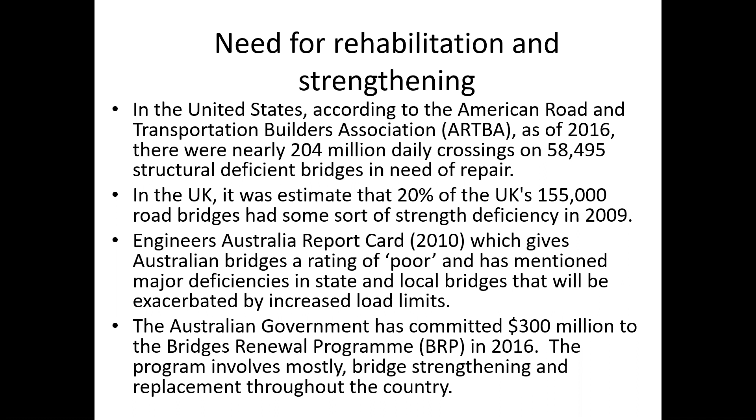Why do we need to do rehabilitation? What's the purpose of rehabilitation? In the United States, according to the American Road and Transportation Builders Association, as of 2016, there are nearly 204 million daily crossings on nearly 60,000 structurally deficient bridges that are in need of repair. There is an equivalent number of such bridges in the UK and in Australia, and the Australian government has embarked on a 300 million dollar project to renew and upgrade the bridges here. I think the situation in the Middle East, in Iraq in particular, is in my view even worse than the situation in the West, insofar as the infrastructure is concerned.

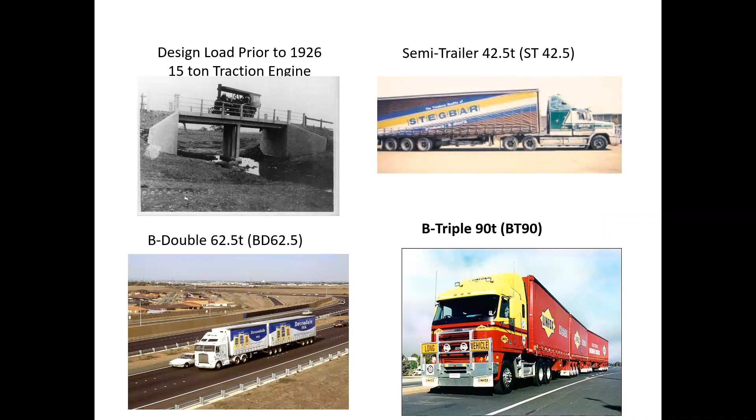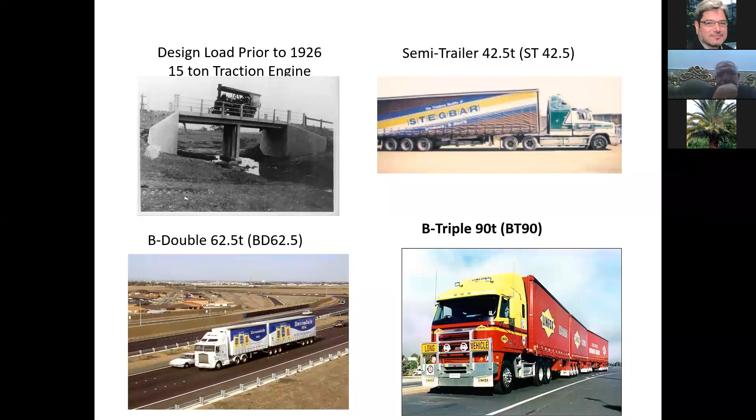Just to give you an idea, we are not just talking here about wear and tear. We are talking here about the increase in the volume and the mass of traffic on our bridges. So just to give you an example, in Australia prior to 1926, the maximum load that you can expect on a bridge is the 15-ton traction engine. What we see on the road network now is much heavier vehicles, like the semi-trailer at 42.5 tons, the B-doubles, and the B-triples, that have very high axle loads individually, as well as a total mass that far exceeds the design of the older bridges.

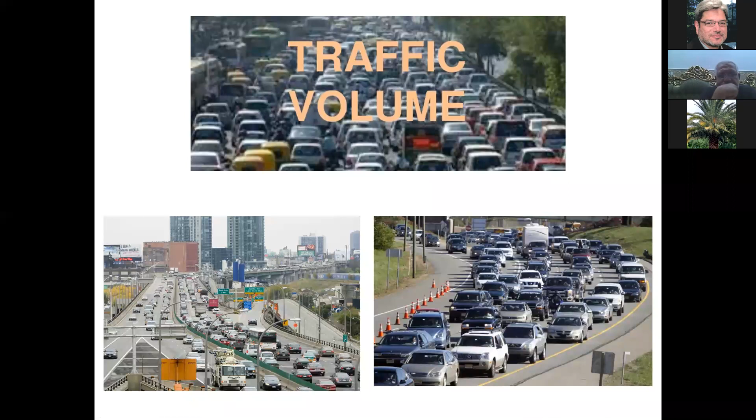Traffic volumes, we know that in the Middle East, in Iraq, and everywhere, traffic volumes have increased also quite significantly over the years. Just to give you an example, one of the major bridges here in Melbourne, Australia, is the West Gate Bridge. The bridge was built to carry 40,000 vehicles a day. It now carries 160,000 vehicles a day. So the volume of the traffic increased, and the mass of the traffic and the weight of the traffic increased as well. We have done many upgrades of major bridges here in the state of Victoria.

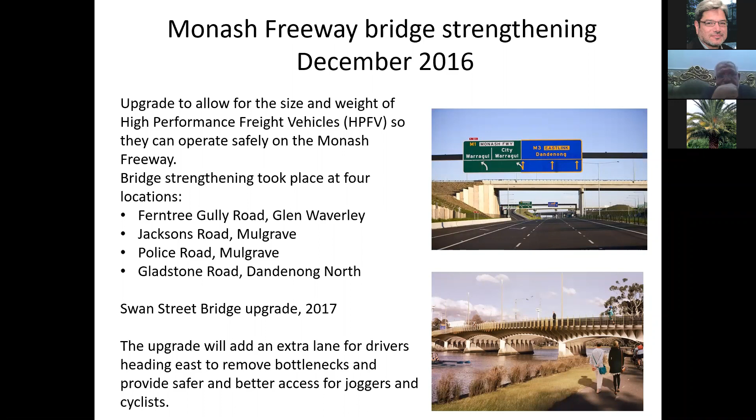As you know, in addition to the traffic volumes and the increases in traffic volumes and mass, concrete degrades with time. So concrete degradation is very important to consider when we strengthen structures.

Concrete degradation includes reinforcement corrosion, chemical damage from chloride or sulfate attack, carbonation of concrete, alkali aggregate reaction leading to concrete cracking and spalling, calcium leaching, and physical damage due to fire, vandalism, explosion, and so on. So there are many causes of damage to concrete that you can see during the service life.

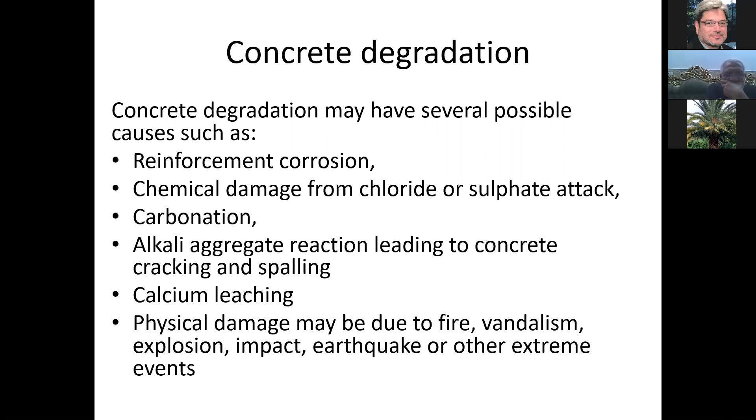Just to show you some examples of these degradations: sulfate attack, chloride attack, alkali aggregate reaction (AAR), which is known as the cancer of concrete, and reinforcement corrosion as well.

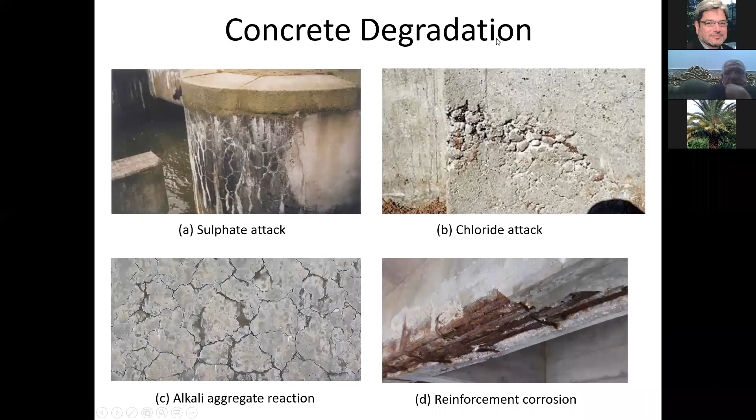By the way, when I use the pointer, do you see it? Yes, gone. Yeah, it's okay. You can see the pointer. Okay, good, because I'm going to use it a lot.

Corrosion causes fracture of the concrete surface, because the reinforcement inside this concrete, when it corrodes, expands in volume. So it starts to push the concrete cover, and you can see the color of corrosion here seeping through these cracks.

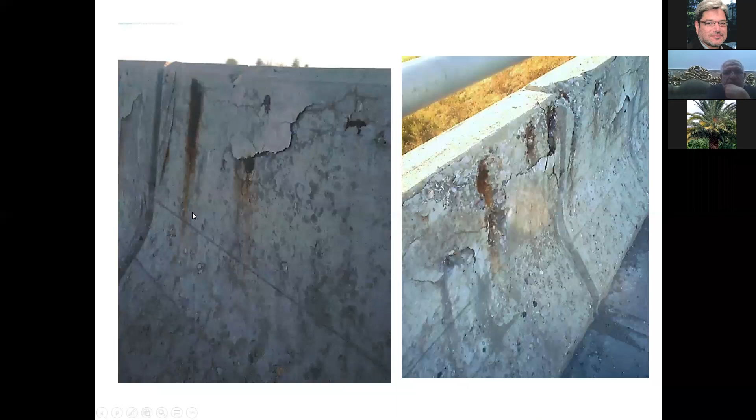There are many such examples. This one is from Canada, to show how much damage steel corrosion has caused. You can see the steel reinforcement not only degraded in terms of size due to corrosion, but some of the stirrups, ligatures, or ties have also fractured because of corrosion. All of this requires the attention of structural engineers in repairing and strengthening such structures.

FRP systems, let me define what these are. FRP systems are fiber reinforced polymers that have key advantages: they are lightweight, non-corrosive, have very high tensile strength, and are available in various forms, sheets and strips.

The sheets can be wrapped to conform to any surface you have, circular or any curved surface. Because of their low density and low weight, they result in very low installation costs. You don't need heavy equipment or heavy machinery to handle this material.

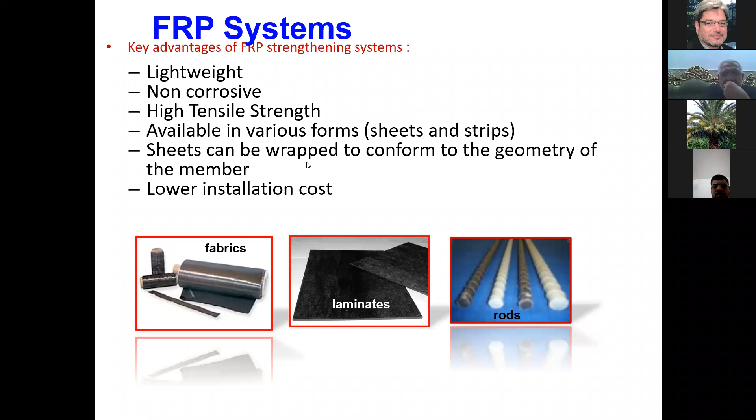You can see here typical FRP strengthening systems. For example, this is column wrapping for confinement of concrete to increase the strength of the concrete inside the column. This is glass fiber being used for strengthening in shear, and this is carbon fiber being used for strengthening in flexure.

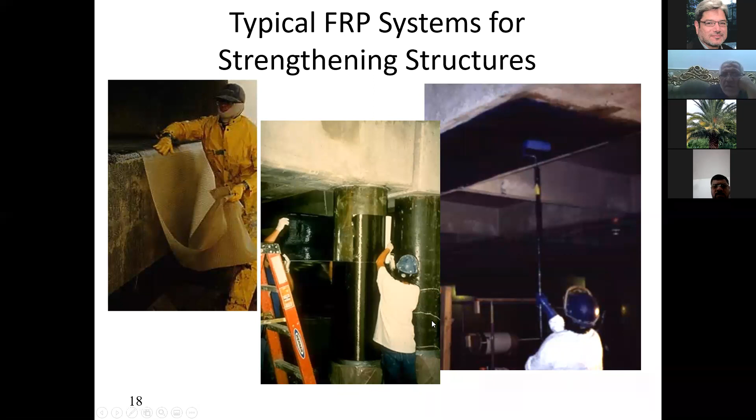The previous slide showed what's known as fabric, which can conform to any surface. These are strips that are used for flat surfaces. You apply the carbon fiber strip to the surface, and this surface has to be carefully prepared, cleaned, and roughened.

When you apply it, you use epoxy - what's known as the two-part epoxy, A and B. This two-part epoxy is usually supplied by the supplier of the carbon fiber itself.

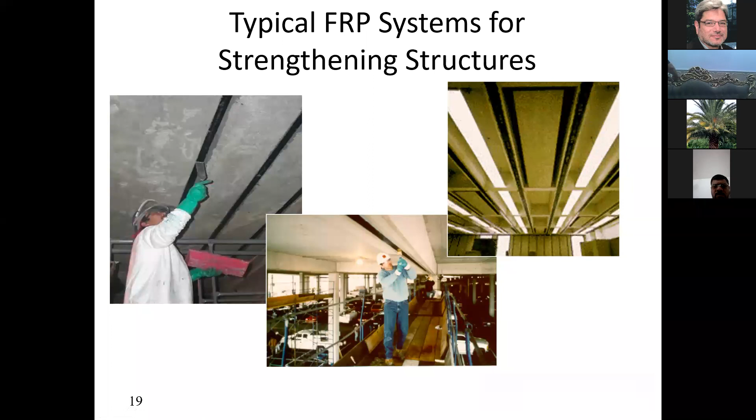The factors affecting the mechanical properties of FRP materials depend on the type of fiber, the fiber volume, fiber orientation, the resin type, manufacturing process, and quality control. So when we say the type of fiber reinforcement, are we using carbon fiber, glass fiber, or aramid fiber? All of these are going to give you different properties.

The fiber volume is how much fiber is there in your laminates. The range of fiber that we mix with the resin to produce the fiber products used in strengthening usually varies between 50 to 70% volume.

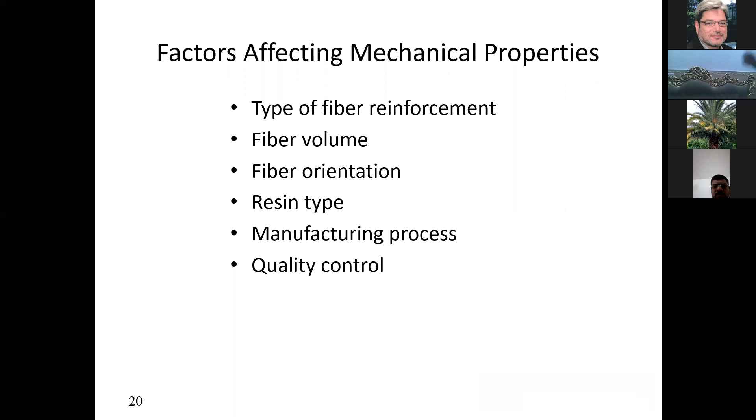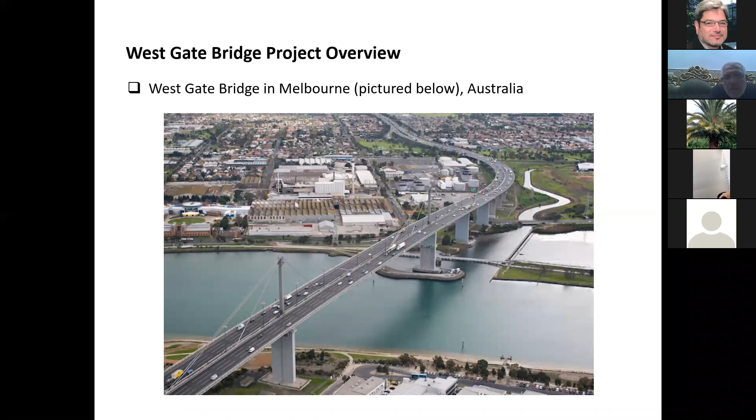There's nothing wrong with this bridge. If you look at the cross-section, this bridge was designed as a 4-lane bridge in each direction, with shoulders and emergency stoppage at the ends. Because of the increase in traffic volume, the road authority decided to transform this into a 5-lane bridge in each direction. The shoulder was made fully operational as a full lane, as you can see here, so it became a 5-lane bridge in each direction.

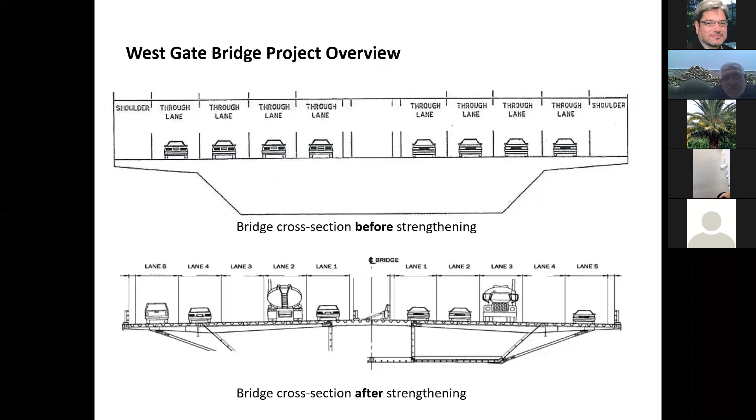This really means you have increased the vertical, the gravity loads on the structure, the live loads. In addition, you have increased the flexural bending moments, the shear, and the torsion on this bridge. An assessment determined that it requires strengthening. The bridge was originally designed to take 40,000 vehicles a day; now it's carrying 160,000 vehicles a day.

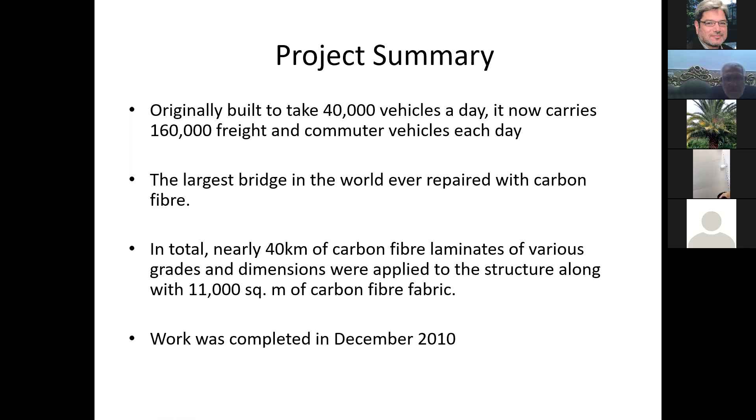It's the largest bridge in the world ever repaired with carbon fiber. In total, about 40 kilometers of carbon fiber laminates of various grades and dimensions were used, and about 11,000 square meters of carbon fiber fabric were used in the strengthening of this bridge. The work was completed in December 2010, about 10 years ago.

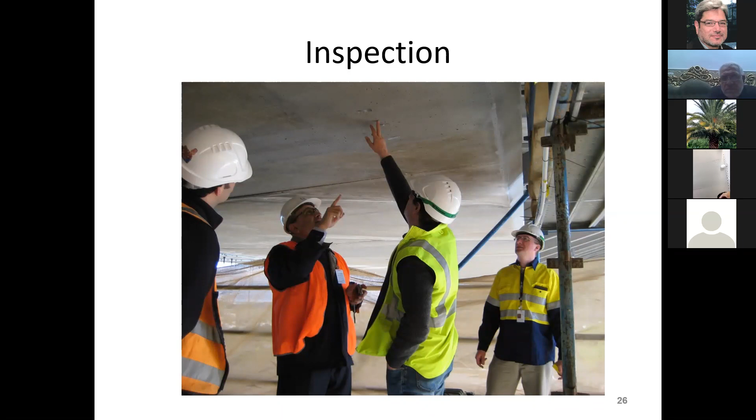We have inspected this bridge and done extensive inspection to see the existing damage, particularly in the form of cracks, because cracks have to be closed and sealed, particularly if they are active cracks, before we endeavor to strengthen.

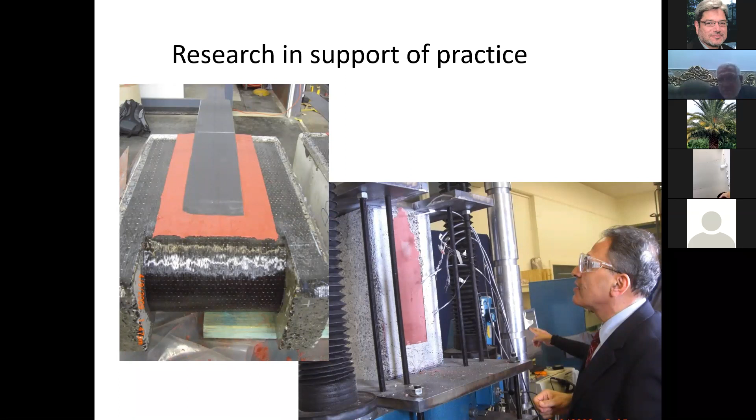We carried out an extensive research project that took about 4 months in order to come up with a viable structural retrofitting system in the form of FRP, especially for this bridge. This was done as the designers were designing and assessing the bridge, and they wanted us to come up with an FRP system that would be very effective.

Basically, this bridge was strengthened for flexure, for shear, and for torsion. You can see these red strips—actually the carbon fiber is black, but this is just for illustration. These strips that we put on the web of the box girder are for shear strength, and these ones at the bottom are for torsion. As you know, in torsional strengthening, you require a full stirrup.

In the form of steel. Sorry, when we design for torsion, the stirrups have to be closed loop because shear stresses occur at the top flange, bottom flange, as well as on the webs.

So these are the strips that you can see here that have been applied to this box girder, these ones. And the technology that we introduced to this is what's known as directional fabrics, to prevent what we call delamination, the delamination of the carbon fiber from the concrete surface.

The technology that we developed was responsible for reducing the amount of FRP for this bridge by about 30%, which was quite significant, both in terms of workmanship, in terms of the amount of work, time of work, as well as in terms of the cost itself.

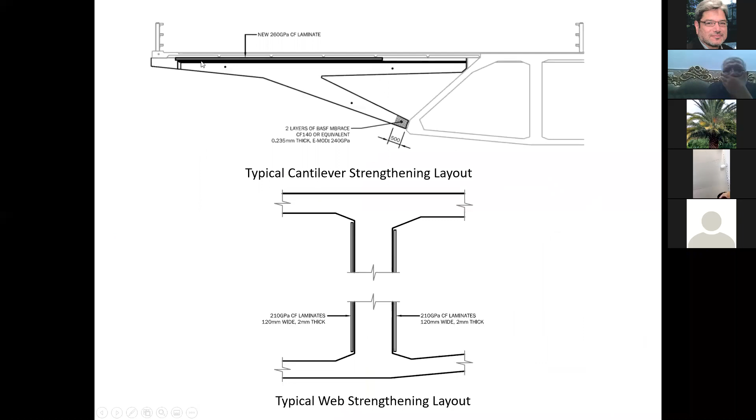Very important here is surface preparation. If your surface is not clean, if it has got debris on it, or if it has got laitance, which is a very weak layer on the surface of the concrete, the technology is not going to work. So what you really need here is to do surface preparation.

So what we do here is that we use either water jetting or sandblasting, and this is to give us surface roughness between 0.5 to 1 millimeter. And we also do what's known as pull-off testing.

The concrete has to have sufficient tensile strength in order for this material with its epoxy to act compositely with the concrete. So the minimum tensile strength that we required for this bridge was 2 MPa, and this is something that we determine by doing pull-off testing, which I will show some pictures of.

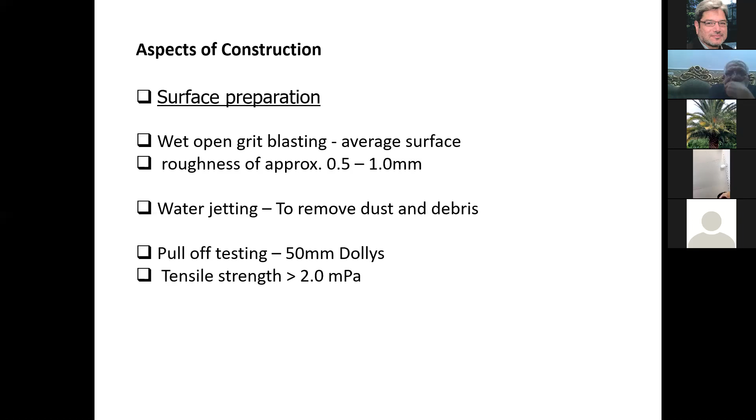According to ACI, the minimum tensile strength is 1.5 MPa, but for this particular bridge we upgraded that. We required a minimum of 2 MPa. And the result of the testing on the bridge gave us between 5 to 6 MPa, so this was no worry whatsoever. So this is during the application process.

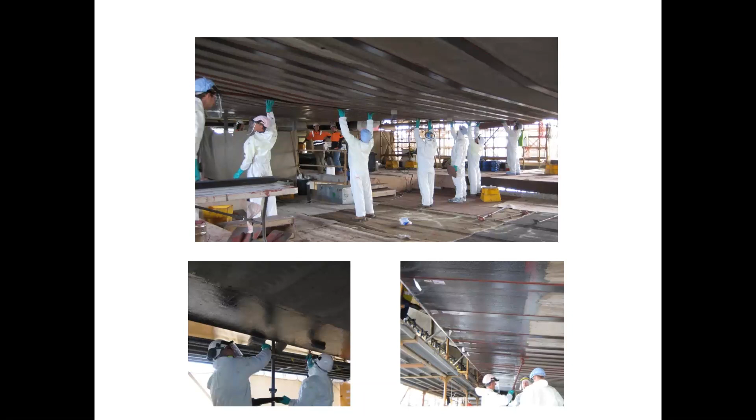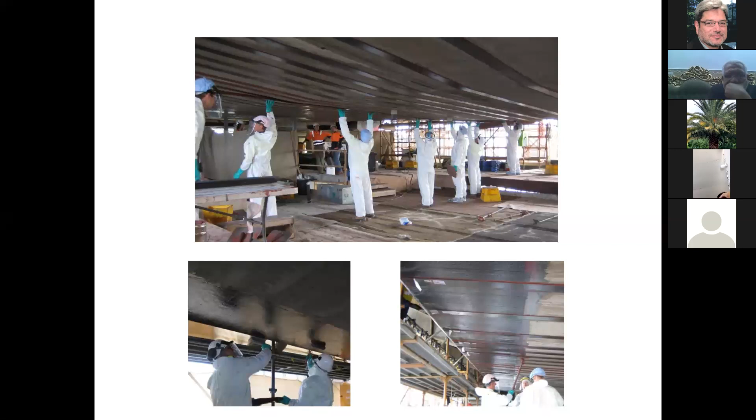As you can see, this is, as I said, a very light material. The number of workers here carrying one strip, it's not because it's heavy, but it's just because of the alignment. As you are applying this with the epoxy, you need a number of people to ensure the proper application of the FRP system.

This is doing work on the cantilevers as well, because this is the top of the cantilever. So putting laminates on the top flange of the cantilever beam to increase its flexural strength. This is where the web of the box girder meets the bottom flange. This is the bottom flange.

Of course, the laminates cannot be bent because these are solid laminates. They stop here, and at the bottom here they also stop. So what we do is use splices. This splice here, we use carbon fiber sheets or carbon fiber fabric to ensure the continuity of force, continuity of stress transfer between the webs and the flanges.

This shows you the cantilever of the bridge, the lateral cantilever, and this is the FRP strengthening system. This point here, see the stem of this cantilever that is bearing against the bottom of the box girder. This area here, because of the increased load on the cantilever, is going to cause extra compressive force in this part of the structural system.

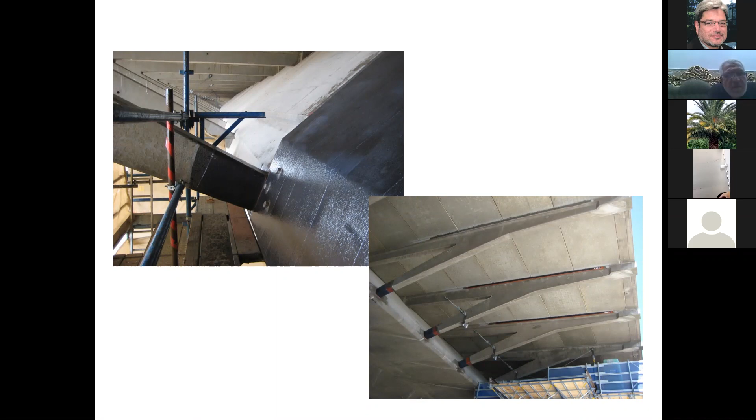So this needed to be confined. The concrete here needed to be confined with carbon fiber. And I will talk about confinement later, how confined concrete can exhibit much higher strength than unconfined concrete.

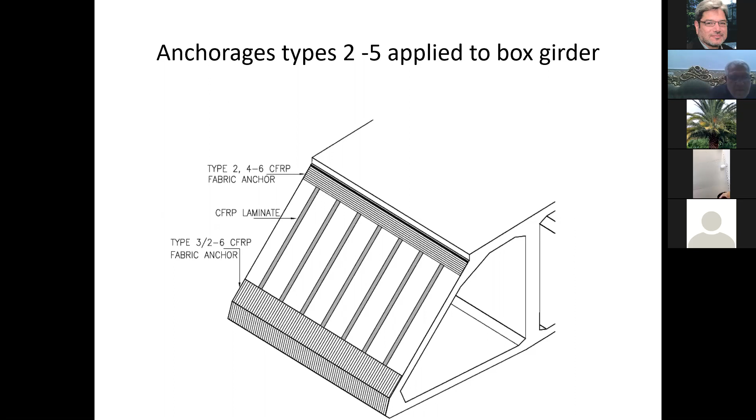As I said, the technology that we developed in the form of what's known as bidirectional fabrics was applied to prevent the debonding, the early debonding of the laminates. We studied that extensively and how we applied it to this first application of STAT on the West Gate Bridge. And now it has become a standard in all the bridges that are being strengthened with FRP.

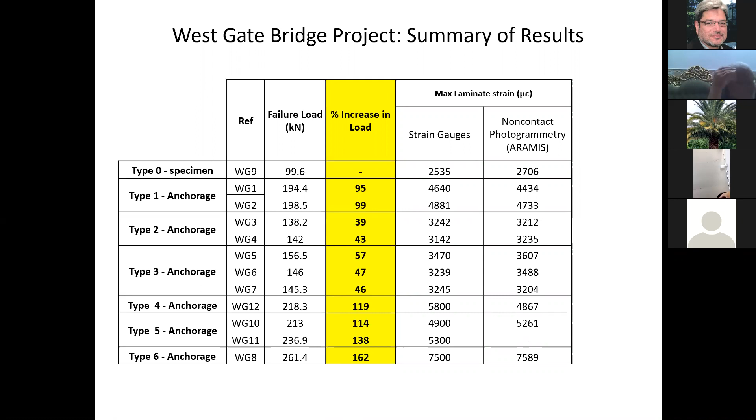This is something we were very happy about, and the Road Authority took these results of the study and applied this system on this bridge. As you can see, this technology has also been applied on other bridges in recent years in the state of Victoria.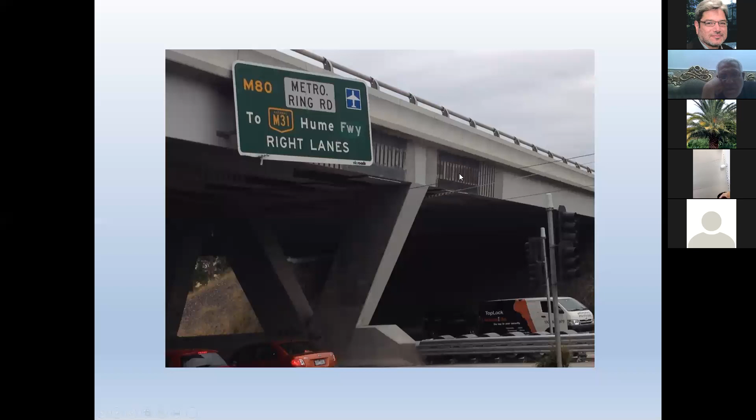So you might ask, how is FRP going to work here? Well, it's not. This is complete damage - what you need is a replacement. And that's what happened. The piers needed complete removal and installation of new piers.

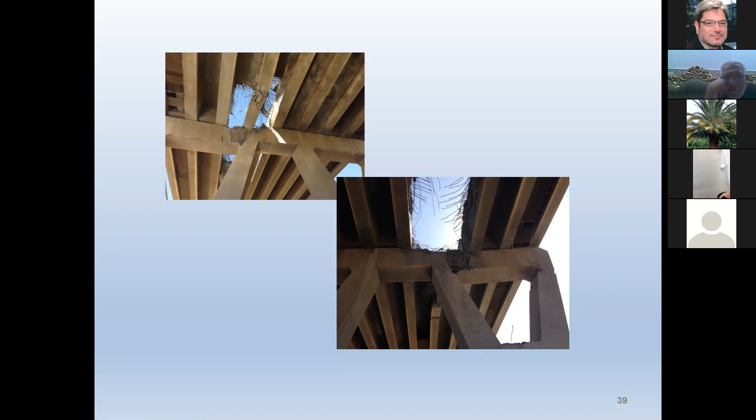The girders themselves are post-tension girders on the deck. Some were heavily damaged and needed to be removed and replaced, while others were partially damaged and required strengthening. The completely damaged girders were removed and steel girders were installed instead of the post-tension concrete ones.

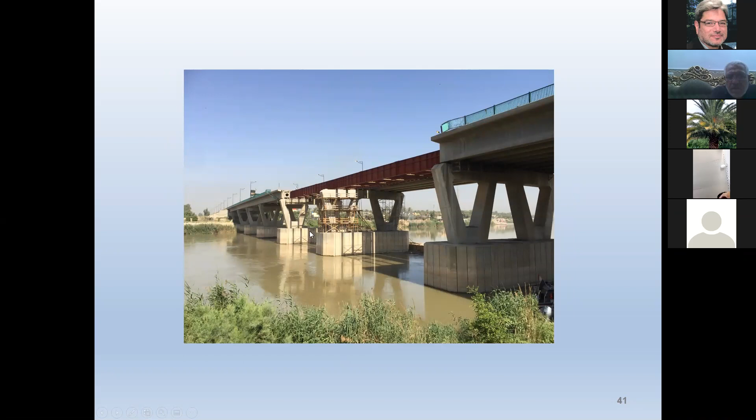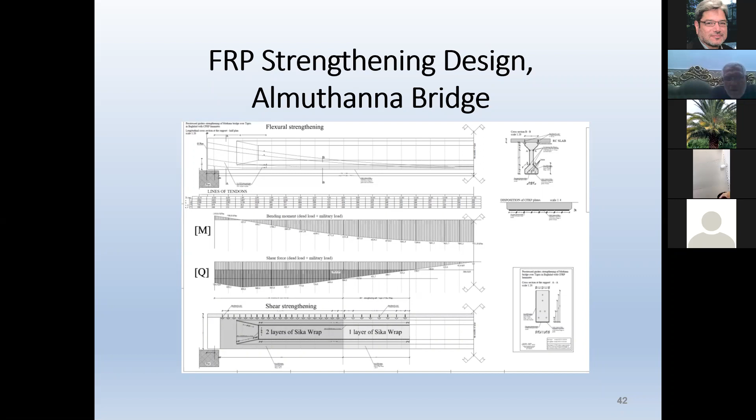As you can see, the piers here are new piers - all the old ones were removed and new piers were cast in place to support the deck. For the girders that were partially damaged, we developed a strengthening system to reinstate their flexural strength as well as their shear strength.

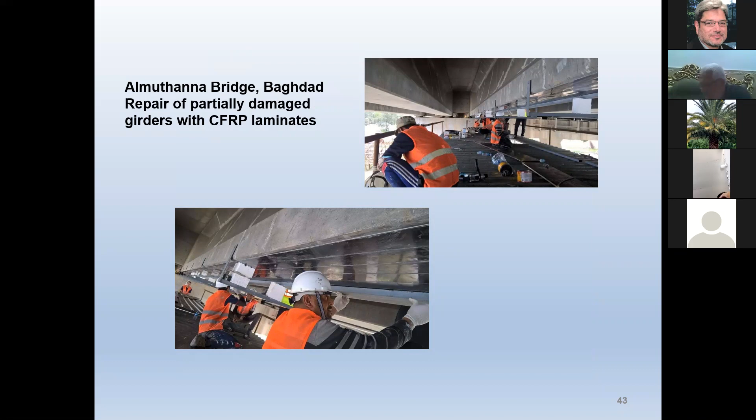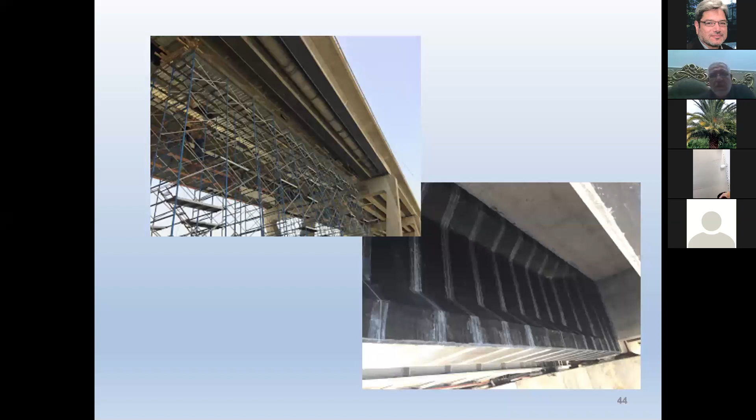We trained many local workers to apply the FRP, and it was done in record time. As you can see here, this is shear strengthening using vertical sheets, and at the bottom there were a lot of strips of FRP laminates to reinstate the flexural capacity of these girders. This is after completion of the work, done a number of years ago.

There is another application, although this is not concrete. Al-Atabah al-Abbasiyya in Karbala wanted to strengthen the dome of Imam al-Abbas Ma'ali Shrine, alayhi salam, in Karbala. The dome itself is made of old brick. By the way, this is a 700 year old dome.

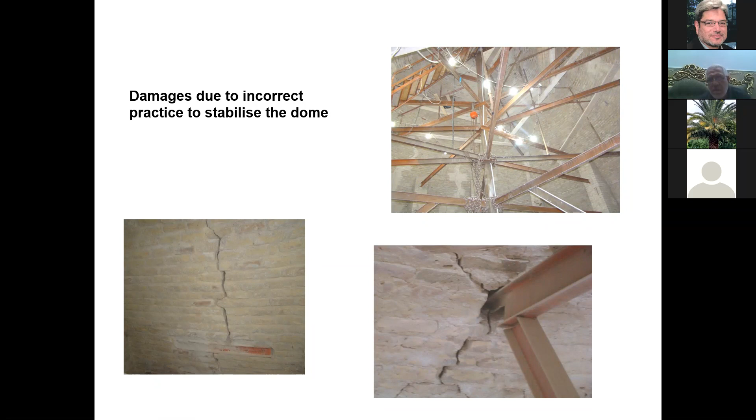In the old days, whenever they saw movement or a crack, they would build a steel frame like that to support the dome. This was done in the 50s, 60s, and 70s. But this strengthening was actually doing more damage than support, because it was a rigid element - any movement or settlement in the dome would cause it to puncture into the body of the dome.

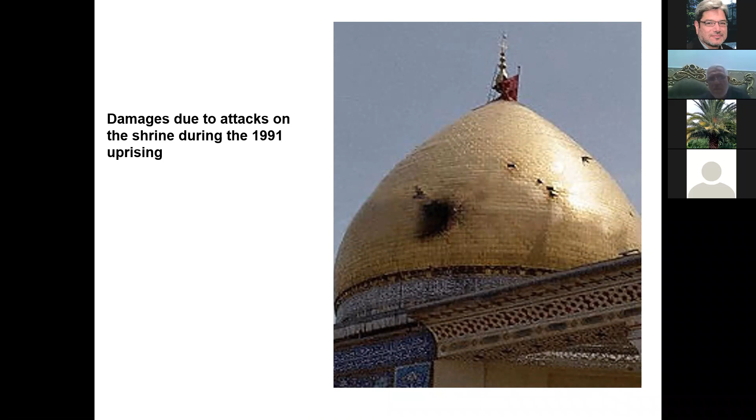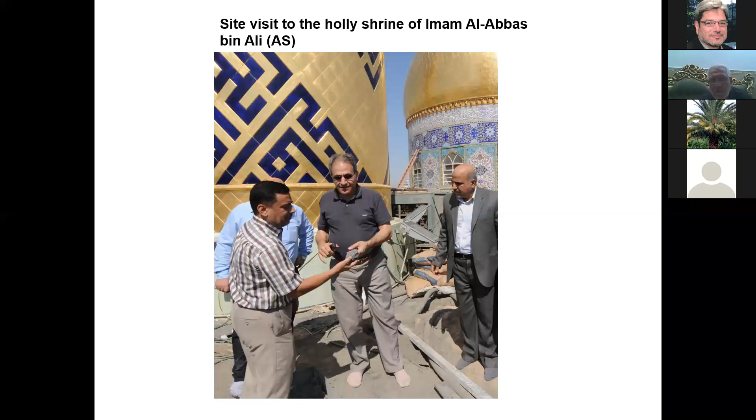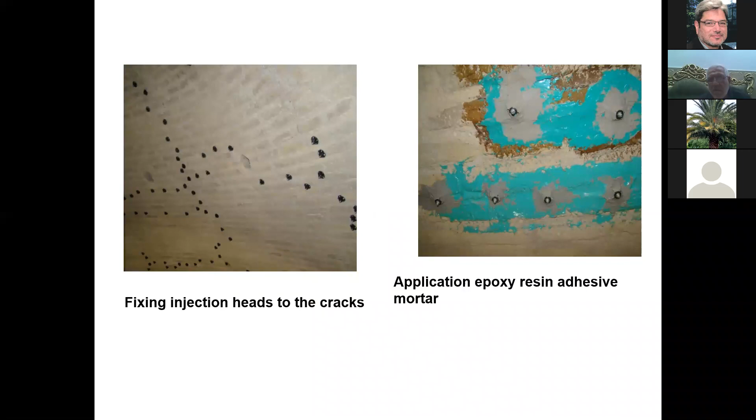There was also damage to the domes during the uprising of 1991. We carried out inspections to determine what kind of technology should be used, and eventually Al-Atabah al-Abbasiyya filled all the cracks and cavities with epoxy, and then used carbon fiber composites to strengthen the dome, removing all the steel skeletons that had caused damage, replacing them with FRP.

This is the first application in Iraq using an FRP system, and the dome is being monitored. The system so far has proven to be very efficient and very effective.

Not only was the dome strengthened, but also the columns of the structure itself were strengthened using composites, FRP composite.

Now, after showing you some of these applications, I'd like to share some design guidelines as per ACI 440, American Concrete Institute 440. They have come up with design guidelines to be used. By the way, it's not a code, it's design guidelines. The design guidelines of ACI 440 are one of the most comprehensive in the world in terms of coverage for various aspects such as flexure, torsion, shear, confinement, material type, material testing, and so on. I strongly recommend the use of ACI 440 for FRP applications.

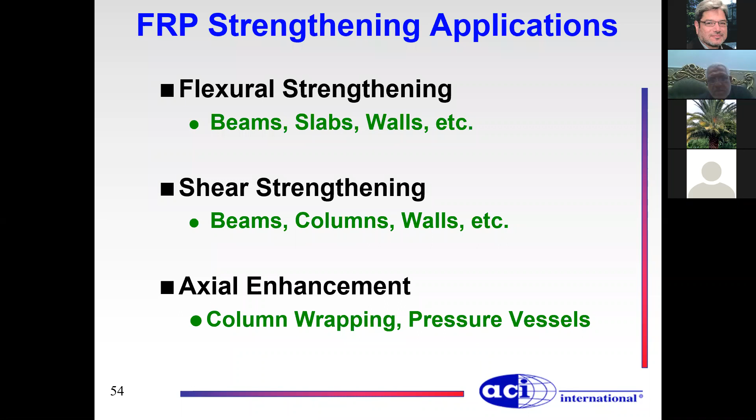I'm not going to go into a lot of details here. This is just to show you that these design guidelines are a simple extension of our normal reinforced concrete theory. We've introduced another element to the composite. For example, reinforced concrete or pre-stressed concrete is composed of steel reinforcement, steel pre-stressing, and concrete. What we're introducing here is an additional element in the form of fiber reinforced polymer. So all the design equations are based on the traditional theory of reinforced and pre-stressed concrete, with an additional component, fiber reinforced polymer, as tension reinforcement.

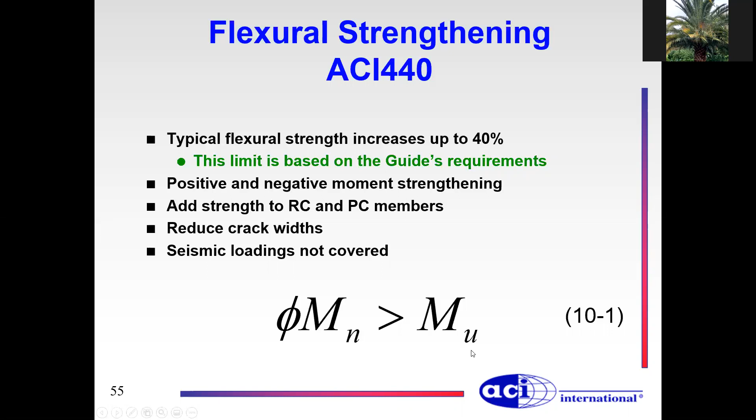What we want here is for the capacity to be greater than the demand. The capacity multiplied by the reduction factor should always be greater than the demand. And this is typically what you will get.

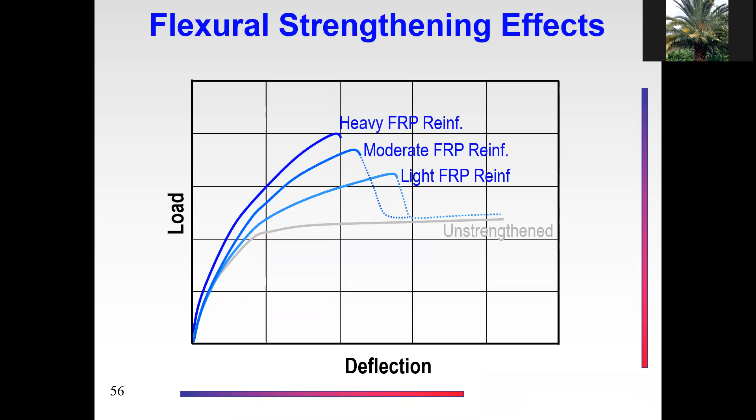If I introduce anchored systems, like we used on the Westgate Bridge that I showed you before—and ACI 440 now recommends the use of anchored systems—you can increase the ductility of the system to move beyond these points, achieving sufficient ductility as required by the standards.

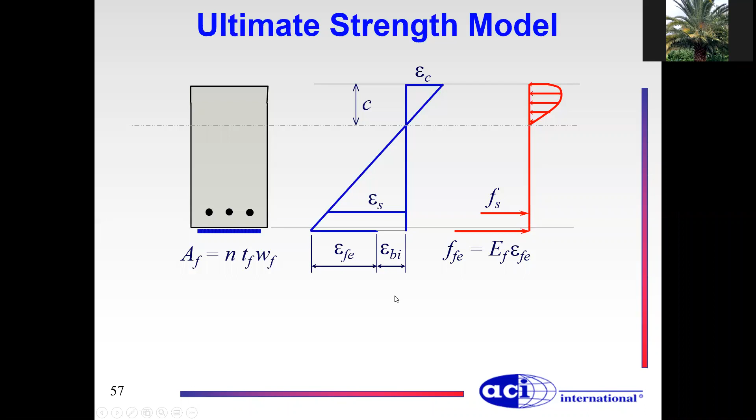So I use the compatibility and equilibrium conditions to come up with the design equations—this is the compatibility part of the formula, and this is the strength, the equilibrium part of the formula.

If you look at the strain distribution diagram and the stress distribution diagram, that's your typical reinforced concrete beam. All I'm doing is adding an additional component that requires some more calculations, which you can find in ACI 440 or textbooks. That's the additional force that comes into the equation.

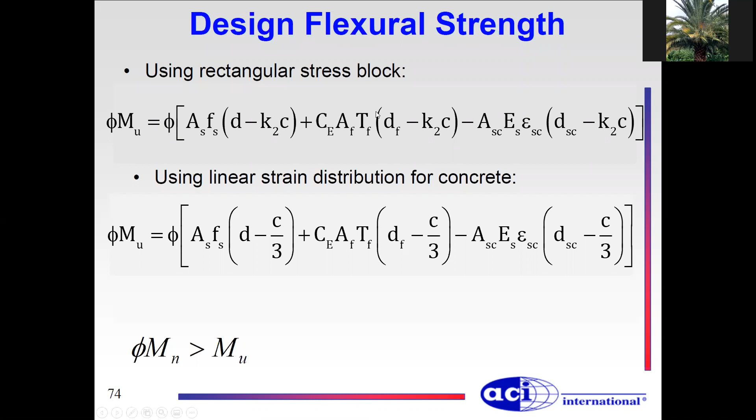Shear strengthening - there are more details to that, by the way. I'm just giving you the skeleton of the design. There are more details you need to look into for calculating these strains and stresses.

Shear strengthening - typically, if you have a beam like this one, when we strengthen it for shear we use FRP with fibers running in the vertical direction, like stirrups, the way we use stirrups inside. So if you have a typical shear-critical beam, unstrengthened, it will fail like that.

As you know, shear failure is usually brittle, unlike flexural failure - you don't see any plateau, you don't see any ductility in the behavior. If I use one ply or one layer of FRP reinforcement, I might get an increase in shear capacity, but again it's going to fail in shear, and it's also brittle.

If I use more FRP, let's say two plies of U-wraps, I'm going to change the failure completely - I'll avoid shear failure and force the failure to go in flexure. Usually this is the preferred type of failure in concrete systems, because flexural failure is ductile. It has an area under the curve in terms of energy absorption, much better than what you get with shear failure. So I've transformed the failure from shear to flexural, which is the desired form of failure.

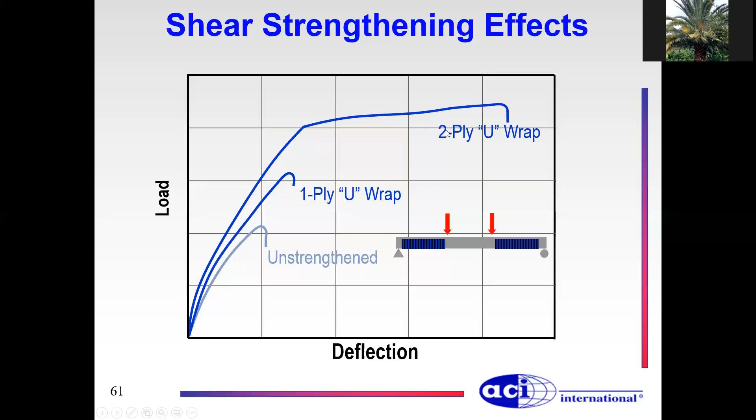Possible shear failure modes: debonding of the FRP sheet, loss of aggregate interlock particularly if the cracks have become big, and sometimes FRP rupture due to stress concentrations.

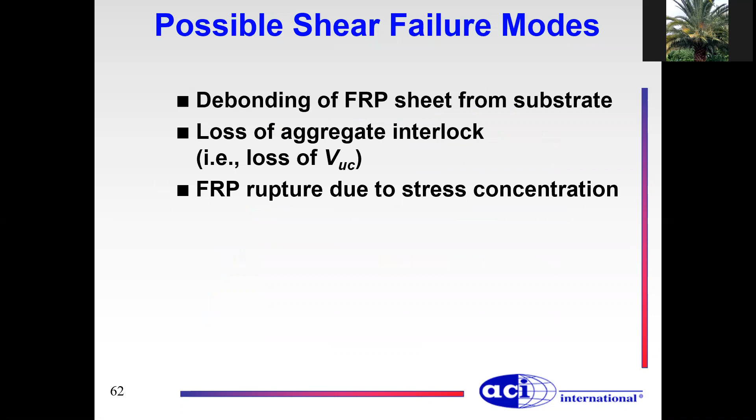Typically that's what it looks like - when you put vertical strips and load this, the FRP resists and develops tension in it. You see this in black, until the stress level in the FRP becomes of such magnitude that it delaminates from the concrete. I want you to pay attention to this delamination surface.

Very, very seldom do you get delamination of the strip, laminate, or sheet at the epoxy line. The epoxy's tensile strength is much higher than that of the concrete. So your weakest point is the concrete - what happens is you pull concrete off when failure occurs like that.

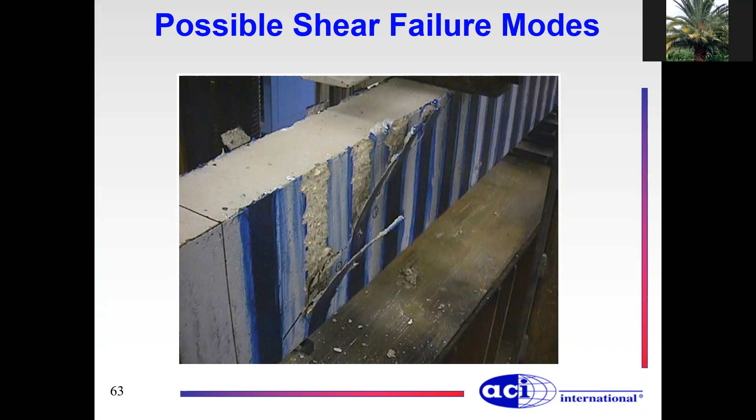We've done some tests on full-scale beams, many years ago - you see these vertical strips are carbon fiber strips. We tested this and published the work at the time. Without strengthening, the shear capacity of the beam was about 250 to 260 kilonewton. When we used the CFRP, we were able to go to about 450 kilonewton, much higher capacity than the unstrengthened beam.

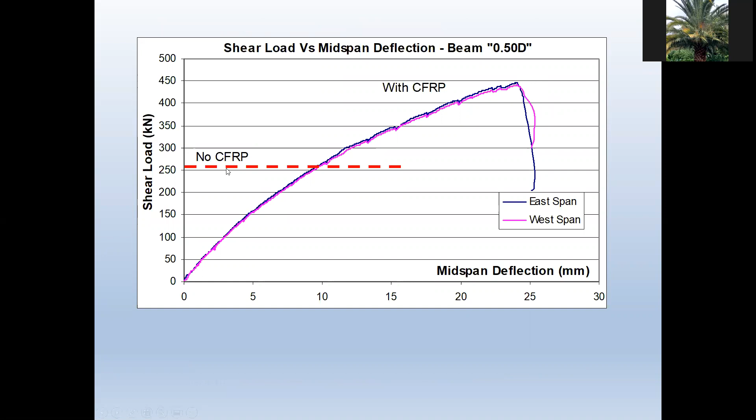So shear, how do we do the calculation for the contribution of the FRP? If you look at this equation and go to ACI 318, your ACI code, you will see that this equation is typically what we use for internal stirrups. The internal stirrups could be vertical or inclined. If vertical, alpha is 90 degrees and this term becomes 1, so you get this equation. This is if you use FRP, which can also be used in a vertical or inclined configuration, and that's why you get this equation for the contribution of the FRP.

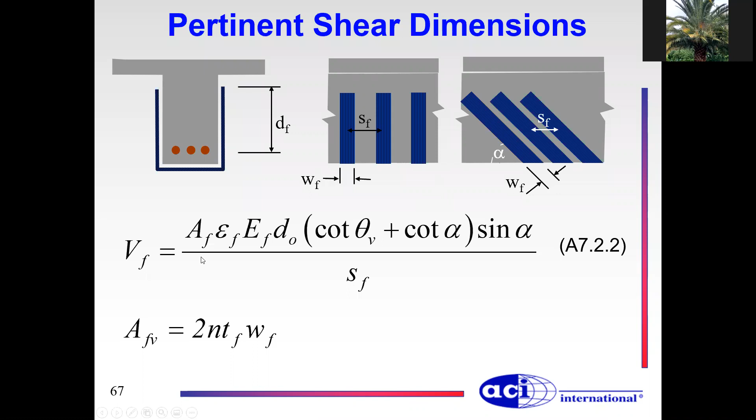All you do is add this component to VUC, the shear capacity of the concrete, VUS, the shear capacity contribution of the internal stirrups, and VUF. PV, if you have prestressed concrete, is the vertical component of the prestressing force. So typically the first three terms are for normal reinforced or prestressed concrete. You've added here a new component, the contribution of the externally applied FRP, same as for shear design of reinforced or prestressed concrete.

CE is a factor here, an environmental factor. Remember the environmental factors you use depend on the degree of exposure on the concrete - what kind of exposure do we have? You see values less than 1: 0.95, 0.9, 0.85, depending on the environmental exposure on the system.

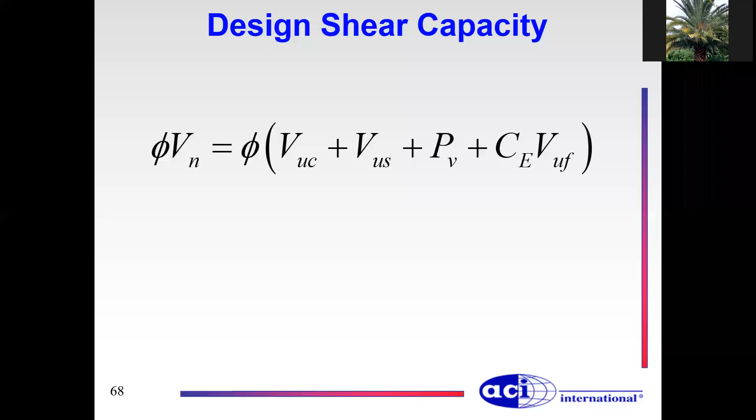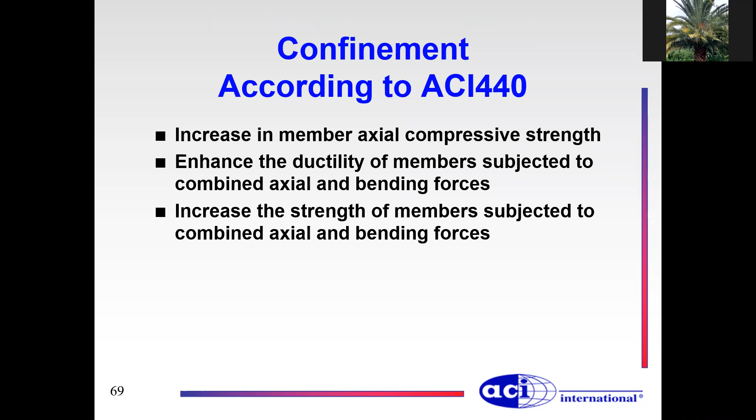The final type of strengthening we use is for strengthening or confining concrete in compression, according to ACI 440. I'm going to show you this video of some of the tests we have done about that.

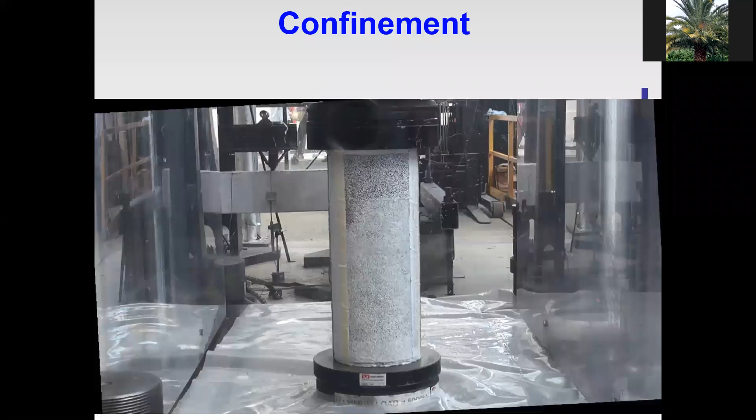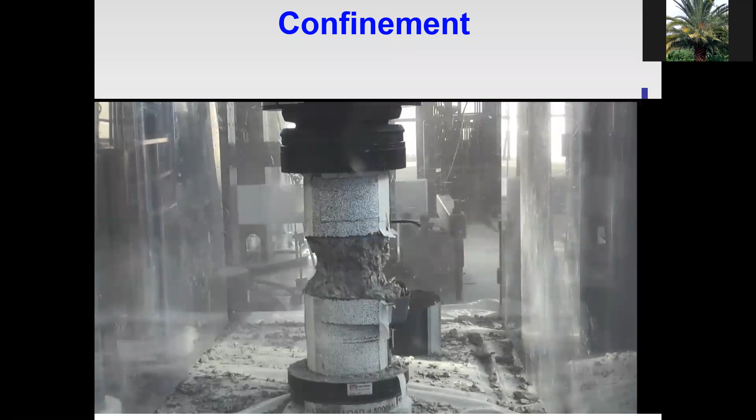This is a concrete cylinder, unreinforced, with carbon fiber applied. The capacity of this was more than double the capacity of the concrete itself in comparison, after we applied this confinement of the concrete.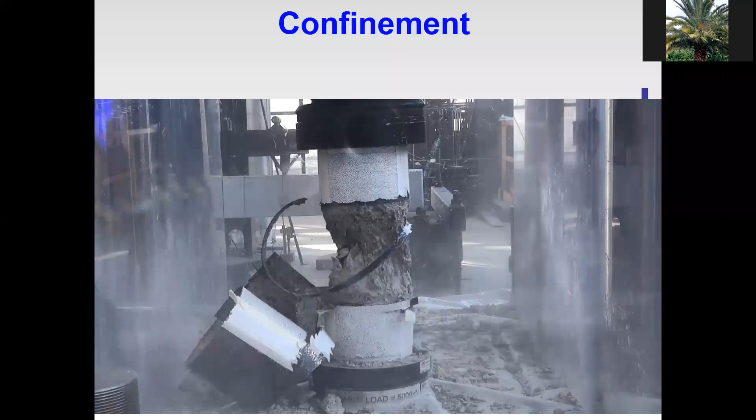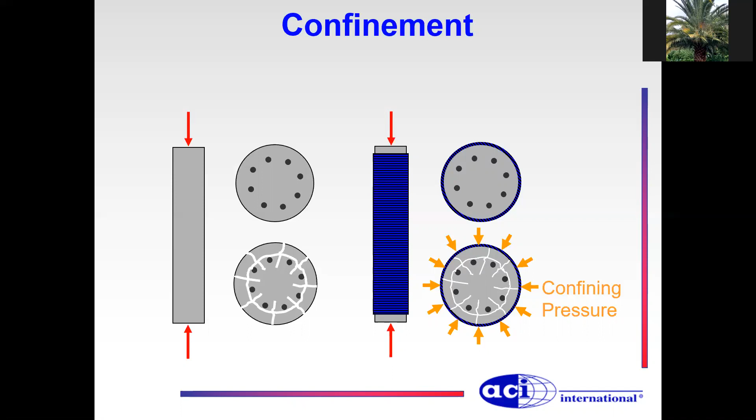So what are we doing here? If it's unconfined concrete, compression causes lateral strains, dilation of the concrete in the radial direction, and you get all kinds of cracks. But when you confine the concrete - and the fiber direction here is horizontal - this loop becomes your confining shell. It's like you have internal steel, either ties or spirals inside the concrete, except we are applying it outside. So when this concrete tries to expand, that expansion is confined by this ring of FRP, which causes confinement of the concrete. This concrete is then under a triaxial state of stress, and the capacity in that case is much higher than the uniaxial state of stress.

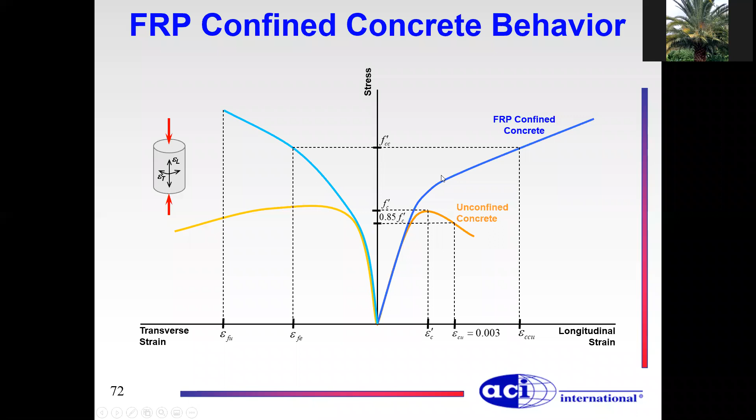We can come up with axial moment interaction diagrams. This is typically for unconfined, normal reinforced concrete columns - you get an interaction diagram like that, and remember this is the balance line. But with FRP confinement, you get much higher capacity. Keep in mind that the FRP confinement works only in the zone where the predominant failure mode is the compression failure of concrete. But in this other zone, very little advantage is gained from confining, because tensile yielding of steel governs the failure of the column. So we can only take advantage of the confinement in the compression failure mode.

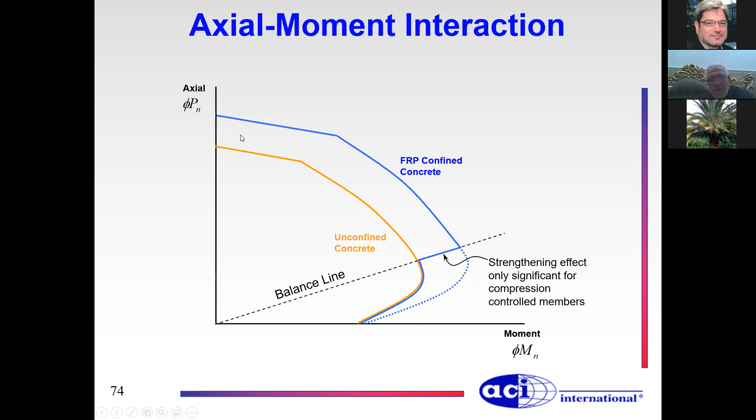Now I'd like to show you a few more slides of some research we are doing, other than FRP - what we call self-prestressing shape memory alloys. We have used this technology for strengthening steel structures quite extensively, but now it's being introduced for strengthening concrete structures.

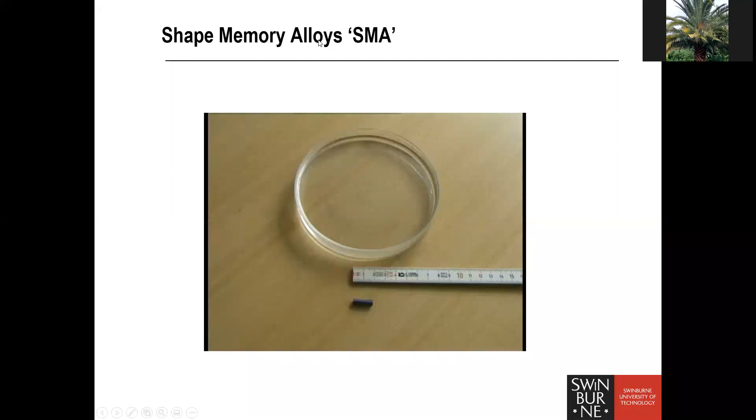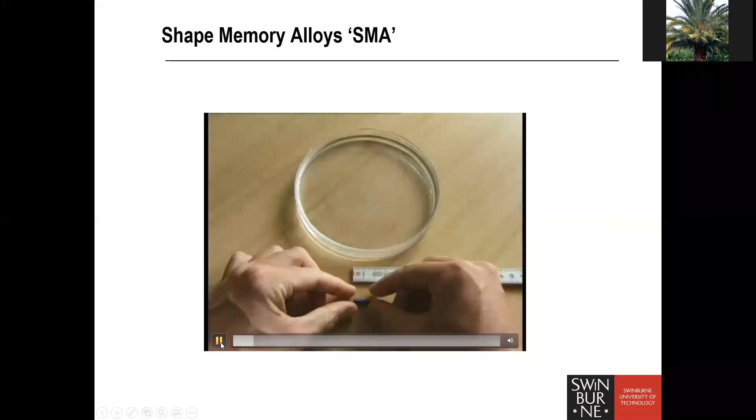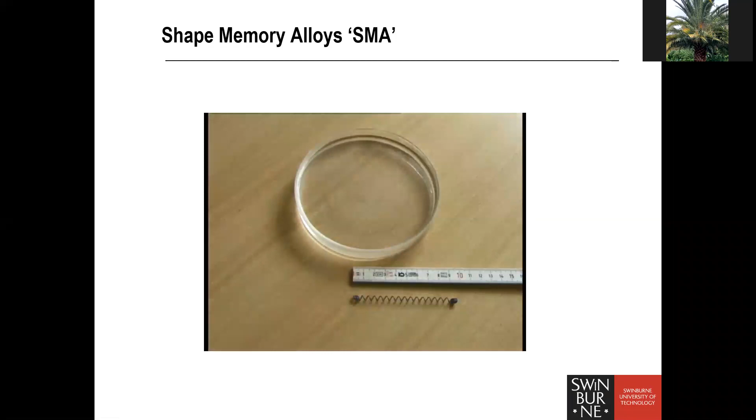I'd like you to look at this video clip. This is a spring made of shape memory alloy metal - it's an alloy, SMA alloy. If you stretch it like that, it doesn't go back to its original position, it just takes that shape. But if you put it in warm water, it goes back to its original position.

So what you have here is the SMA spring. You stretch it, put it in warm water, and it goes back to its original position. Now let's say it's not a spring, but a shape memory alloy in the form of a rod, a bar. You stretch it and put it inside concrete.

Now you heat this shape memory alloy element. How do you heat it? Let's say through electrical wire, electrical current. What does this want to do? It wants to go back to its original position, its original length. It remembers its original length, and that's the term shape memory alloy. So what does it do? It puts compression on the concrete. Isn't this pre-stressing? It's as if you are doing pre-stressed concrete without using jacks.

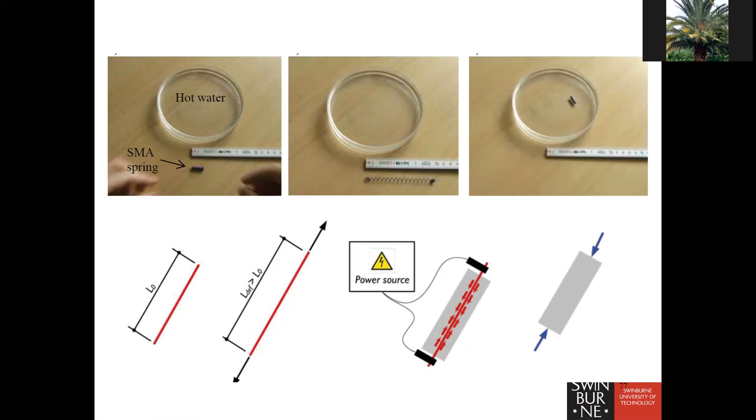EMPA in Switzerland started experimenting with this technology, and these bars here are shape memory alloy bars. They are subjected to electrical current to produce heat in these shape memory bars. When you subject it to heat, the bars want to go back to their original position, and they put pre-stressing compression on the concrete. That's the concept of pre-stressed concrete.

We are doing a lot of work now in Australia on the use of this technology. In fact, we also have a master's student at the University of Baghdad, civil engineering, doing some work on this shape memory alloy as a pre-stressing material. So these are all new technologies, and you can use this for new structures.

So what does it have to do with strengthening? Well, how about if you have a serviceability issue with a girder in a bridge or a building? You can apply this pre-stressing externally. You can put it at the bottom, anchor it from one end and the other end, and apply the pre-stressing, apply the heat. Or you can drill a chase, cut a groove inside the concrete, and embed this bar inside as a strengthening material to restore acceptable serviceability conditions by reducing deflections and crack widths. So it can be used for new structures, and as strengthening for damaged structures.

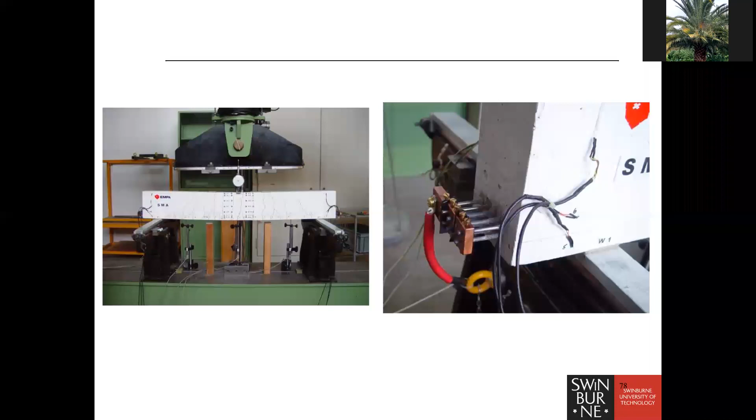Finally, I would like to share with you a textbook that my colleague Dr. Robin Kalfat and I produced in August 2018 on the rehabilitation of concrete structures with fiber reinforced polymers. This textbook has a lot of design examples based on ACI 440, our own Australian standards, and also British standards, all worked examples according to these different technologies and design guidelines.

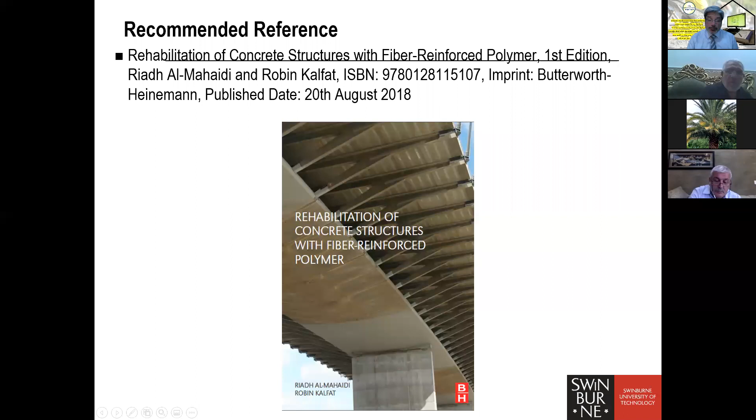Yes, thank you, Doctor. Maybe other questions also related to this same concern about the temperature. So the other question is about the Al Muthanna Bridge project - what were the factors used to account for the very high temperature in Iraq? We know there are no guidelines and codes to allow for such temperature.

As I mentioned, we did use a factor relevant to that CE factor. Because of the high temperatures, which is 50, 55 degrees, we wanted the glass transition temperature to be at 75 and above on that bridge. And also we used a capacity reduction factor relevant to that environmental exposure in Iraq. So what about the value of this C sub E, Doctor?

It was left for the professional engineer. I think it's difficult - no, it's in the code, Dr. Ali, so there is a code for that. Yes, it's in the ACI 440, it has got values.

Let me stop sharing - I don't need to share this anymore. Yeah, so that way you can see me. Yes, just a minute. So in that case, just one second please, let me adjust my camera here.